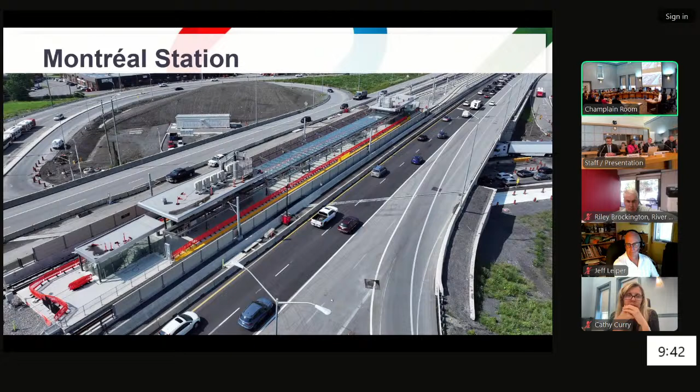Montreal Station, as you can see, the station platform is basically completed. We have orange protection gates because train service testing is currently underway all the way out to Trim Station in the east, very successfully. A lot of the underground work is what we're working on right now, so you'll see some lane closures and restrictions as part of that.

The left photo is actually the fare entrance gate and the lantern on the far left that you can see there. We've finished the cycle track and sidewalk works. Now we're currently working on the east side of the station to do the same. You can see the coil grills are in place, as well as the signage and wayfinding that's started on the east entrance.

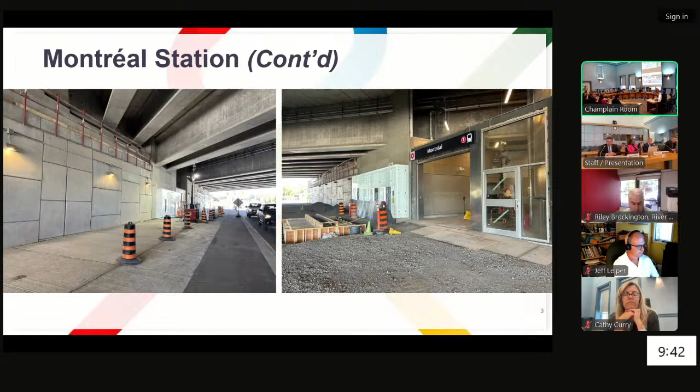Jeanne d'Arc Station itself - we're currently working on the interior station finishes, and the final connectivity portions to the station. On the right-hand side of the photo, a lot of the hard surface works, sidewalk entrance into the plaza, as well as the asphalt works have been completed. We'll see more of that on the next slide.

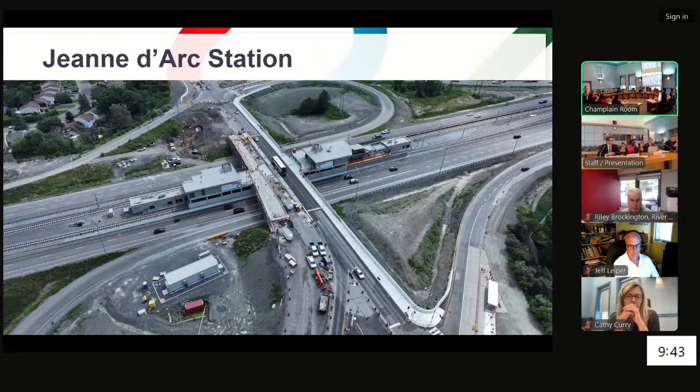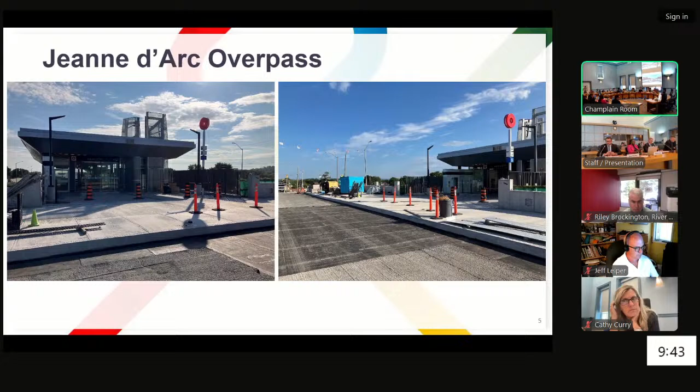As you can see here, our plaza entranceways are completed into the actual station entrances. The hard surface works for pedestrian access are completed. And we're currently working on the waterproofing on the bridge structure, as well as the asphalt to come.

Convent Glen Station - we're currently working on the sidewalks, as well as passenger pickup and drop-off areas on the quadrants of that station. We're also working on the elevator installation and interior finishes at this station.

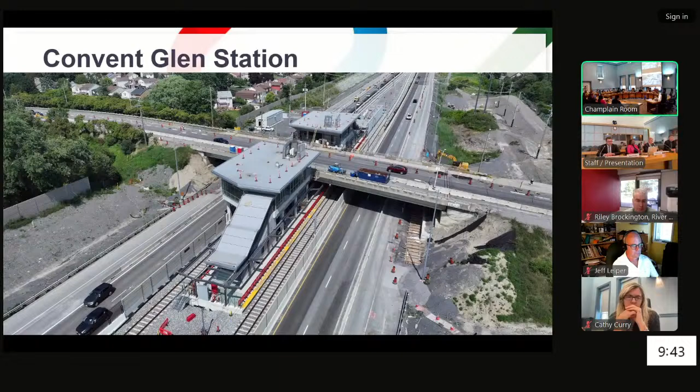In this slide we drop into the actual station platform. You can see our staircases are completed with handrails. The lighting is done on the platform. Our platform edging is in place. Wayfinding and signage is there, and you see some protection on the actual elevators, protecting the stainless steel. Essentially a finished product at the station right now, from what you would see.

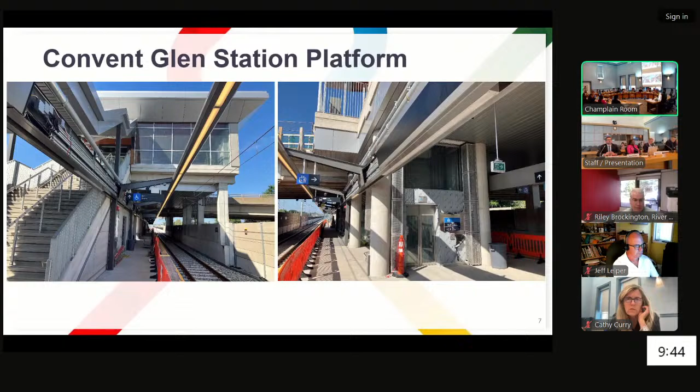Place d'Orléans Station - we have the existing pedestrian bridge structure, which you can see is the red roof structure, going from the bus rapid transit park and ride to the Orleans Mall Centre. We have the new pedestrian bridge that's been put in place, connecting our BRT loop facility to the LRT platform. Currently we're working on the bus loop construction and park and ride rehabilitation.

What you can see here on the left photo is actually the last fare gate system to go in as part of the east. Pretty exciting for the group that once that's in place, more testing and commissioning can come as part of it. A lot of the interior finishes are essentially complete, with just minor touch-ups remaining.

The photo on the right-hand side is that new pedestrian bridge connection structure that operates between the bus rapid transit system and the LRT platform. Through the glazing on the left-hand side, you can see the red roof of that existing PED structure, so they run parallel to one another. As part of this bridge structure, a lot of those drilled holes on the right-hand side are basically going to be the tactile warning strips put in place for accessibility and wayfinding for those users.

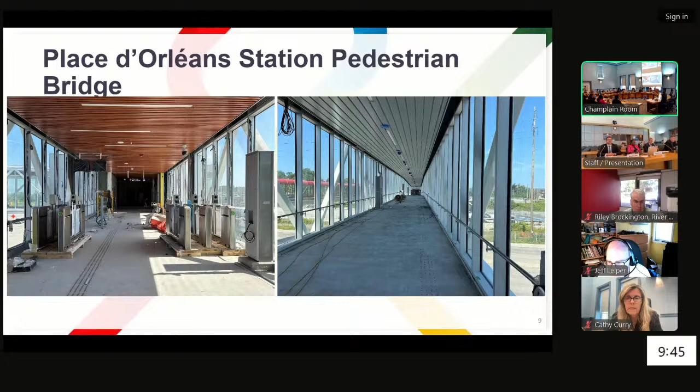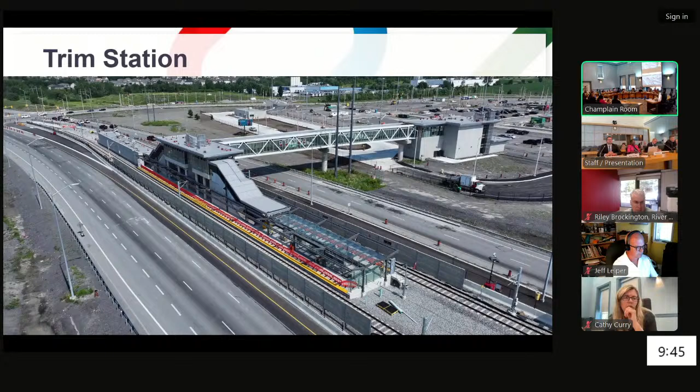So the last station on the east as part of the system—currently we're working on the escalators and elevator installation in the station and the BRT connection, the bus operator building commissioning, which is just far on the top of the actual photo. We'll get a close up in a second, as well as we're working on the park and ride construction at this location.

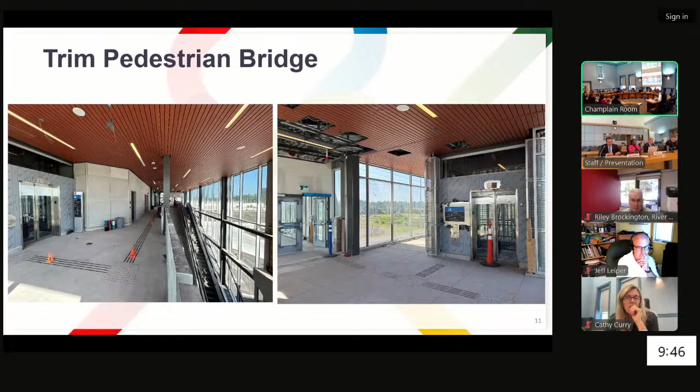The photo on the right is where essentially you would come to as part of that. We have our elevator systems shown there. Just behind that area where the glazing is, left of the elevator system, you would carry through there and down onto the platform edge. A lot of the interior finishes are done, with minor cleanup to be completed, but essentially it's looking like a finished product here.

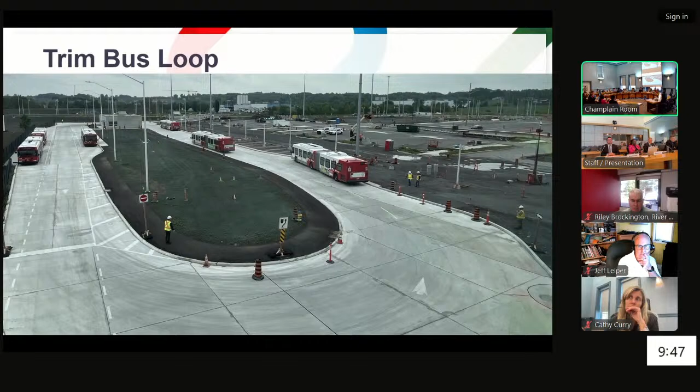This is the bus loop at Trim Road itself, basically completed at this time with some minor finishing work to be done. A couple of weeks ago, we actually completed the test run for the OC Transpo to make sure that it will operate as intended, and it was a successful test procedure. In turn, we're looking to flip the buses into this bus loop in the middle of September here.

As part of other works we'll see in the east activity, we'll have some connectivity enhancements that will continue at Jeanne d'Arc Boulevard. Train testing will ramp up as we move into winter 2024. Station completion is a big milestone we're looking forward to in winter 2024—this is where these finishes will come into play. Testing and commissioning will continue to move along, and occupancy for these stations will start to materialize. At the end of 2024, we're going to have some paving operations happening on the 174, essentially from Champlain to Trim.

Just some highlights related to traffic and mobility impacts: on Highway 174, there'll be ongoing lane and ramp closures to facilitate a lot of these paving works in 2024 as well as 2025. Montreal Road, as shown in some of the photo updates at the start of the presentation, there are impacts right now with lane closures, to facilitate some of the station entrance works as well as utility works.

Jeanne d'Arc Boulevard—we still have various traffic configurations, so we're flipping traffic to facilitate a lot of the works for the entrance as well as the bridge rehab that needs to be done. Because of the expansion of the bridge structure, we'll essentially have to put new bearings underneath it, so there's some bridge work to be done, with impacts in this upcoming season. As well, Orleans Boulevard and Champlain Street will have lane closures and restrictions in this area, to help facilitate the construction for our Place Orleans station.

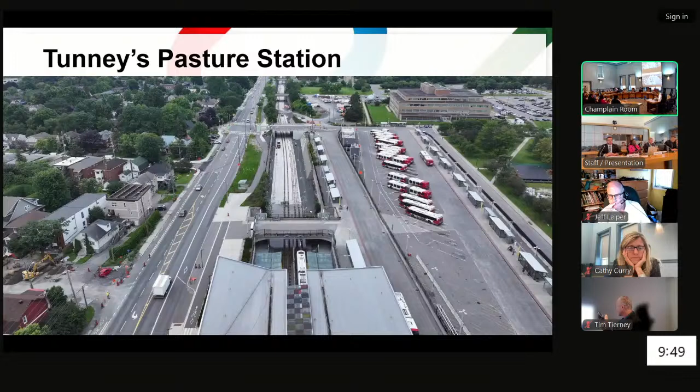So the first station is the stage 1, stage 2 interface as part of Tunney's Pasture. Construction is currently going on the rail system, where we're constructing the concrete rail plinths that need to go in place on top of the storm sewer system, as well as working on the ultimate bus rapid transit system design layout. Where the buses are now is the interim phase. We're currently working on an ultimate arrangement for when LRT stage 2 is in operation, working with Public Services and Procurement Canada, and hoping to have the design finished by the end of this season.

So what you see here is the rail interface between stage 2 and stage 1. A big milestone we completed recently was during the 2-week maintenance shutdown, where there were many coordination meetings and efforts by staff and the maintainer to facilitate some tie-in works. What that does for us is minimize the impacts to stage 1 revenue service. A huge milestone for the team, well done to them.

The works done as part of this, just to clarify: we had OCS tie-in works, and we had to provide new contact wires from the stage 1 into the stage 2 interface.

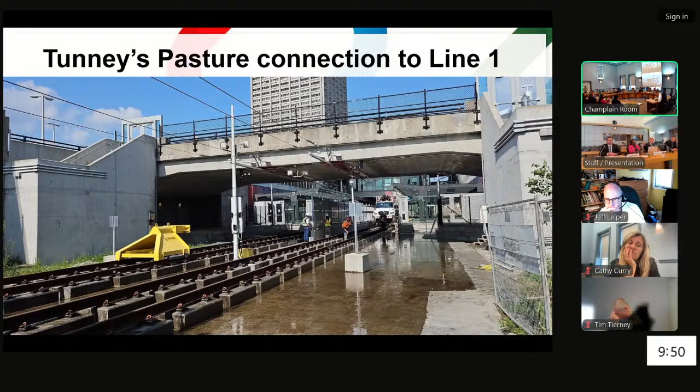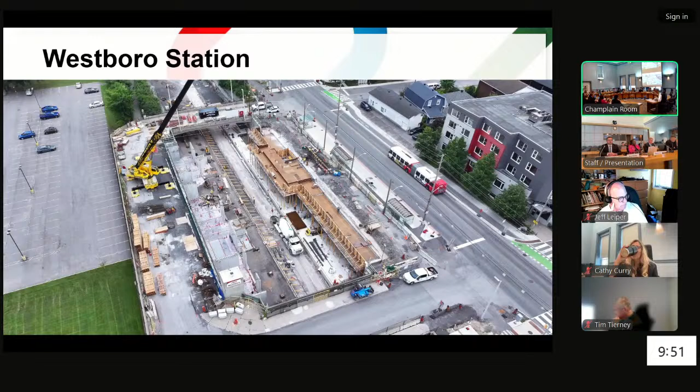Westboro Station: a lot of the works are focused within the trench itself, related to concrete works on the platform and the walls supporting the structure.

You can see a lot of the formwork there. The platforms are poured at this time, with a lot of formwork and false work in place to facilitate those concrete works. One thing I'll note is that when the rail system gets put in place, between these platforms there's actually a concrete structure - a major storm sewer collector system that the rail system will run on. That system takes water from the Westboro area and travels all the way down through Tunney's Pasture and out to the Ottawa River. We're currently working on rehabilitation of that structure, then concrete plinths will go on top, then the rail structure. You'll start to see that materialize in the fall and in 2025.

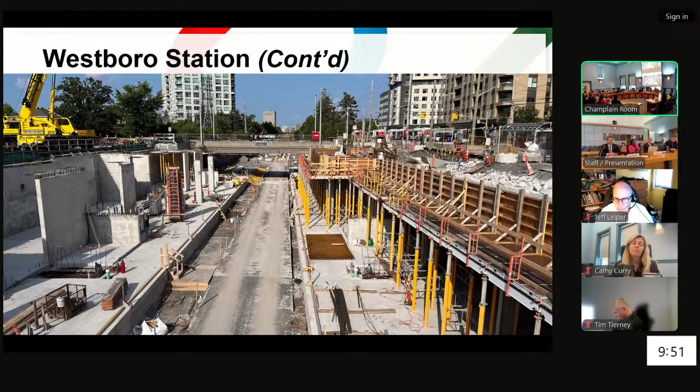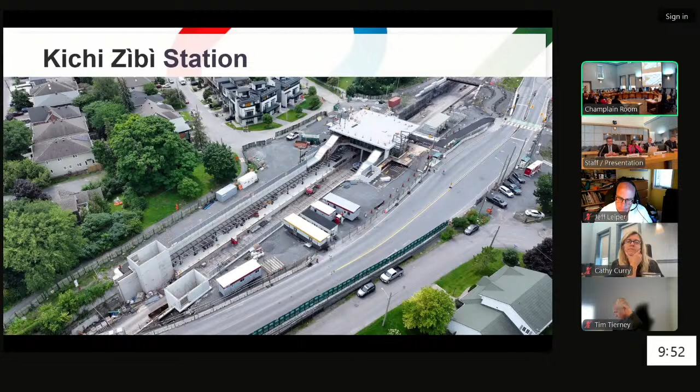This is the west edge of the station for Kichi Zìbì, and this is the new pedestrian access in and out for that location.

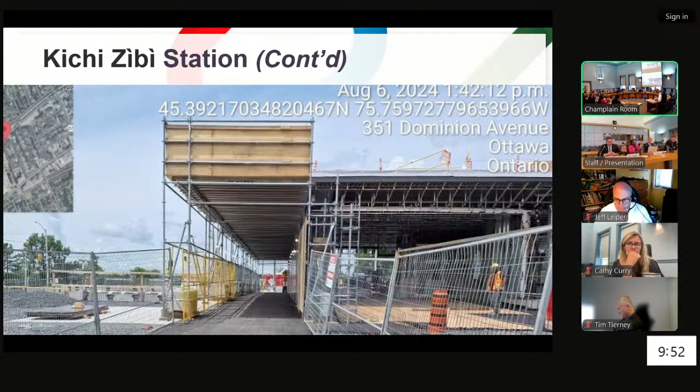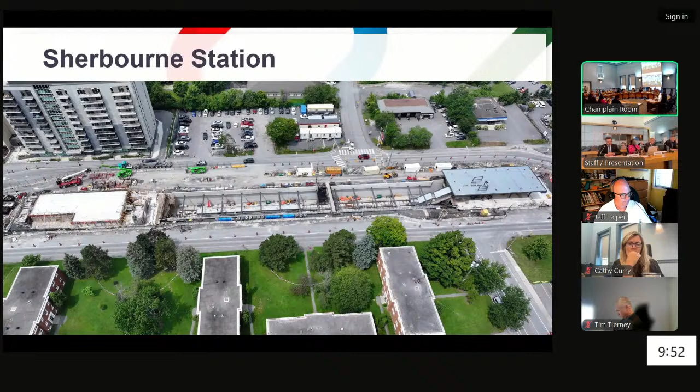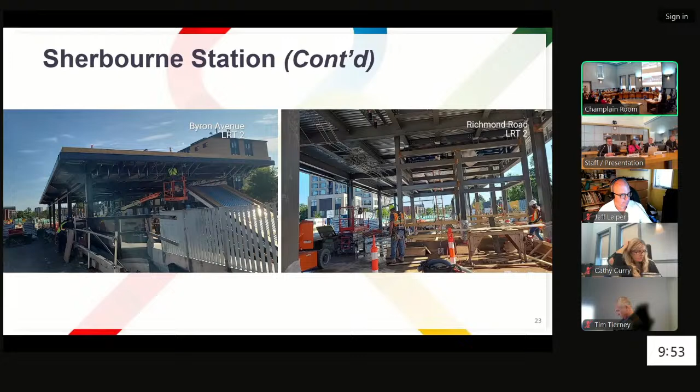Sherbourne Station is the first station on the Parkway Tunnel. The concrete works as part of this station are essentially completed, and we're currently working on the structural steel. Diving into the actual head house itself, you'll see a lot of the steel work is in place, the roofing, and some mechanical components. The next works to facilitate are the glazing component, to start enclosing these structures.

The next station moving west is New Orchard Station. It's similar in nature but a little more advanced than Sherbourne Station. Here our structural steel is completed, and we have glazing works on the station underway. Progress is looking well.

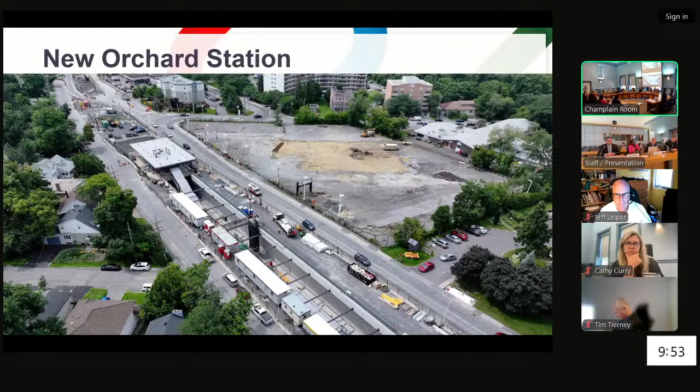At platform level, you can see a lot of the interior shell of the station platform. It is a center platform station. We have drywall, some mechanical and electrical work to go underway here coming up next. Following that, we'll start pulling concrete plinths and rail through the actual station itself.

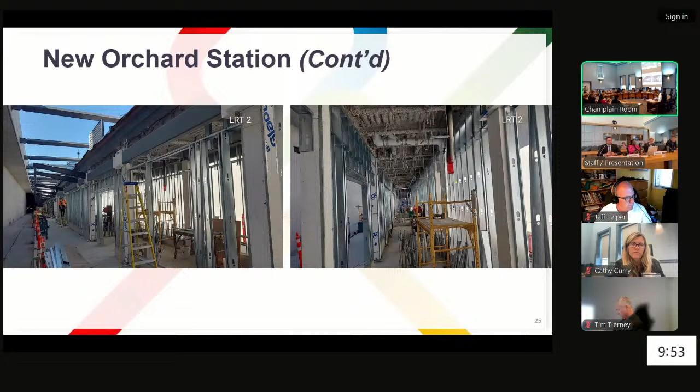So I want to give you an update on the cut and cover progress as a whole. We completed the tunnel construction components itself and started the backfilling components. There's a lot of work shown in this area that may not be apparent to the public. We have the Parkway Tunnel, the East Portal entrance to it, and Kichi Zìbì Station off in the distance. We have the temporary bus tour currently in place, and Kichi Zìbì Mìkan, which we're phasing and staging to facilitate construction of the tunnel. Off to the right is where vehicles and C-cans are, which is Rochester Field, but ultimately it'll be rehabilitated into a park area. There's a lot of work still to come here and a lot of coordination involved.

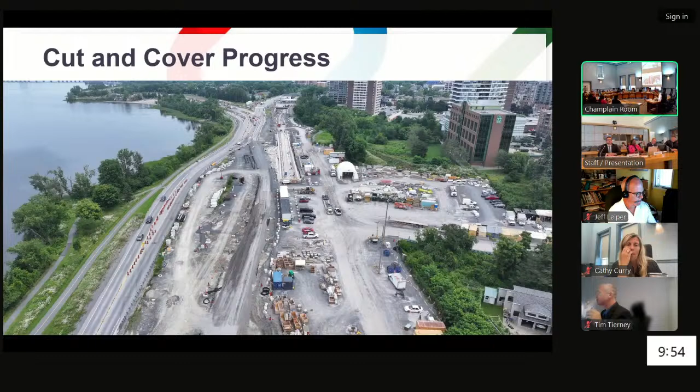In the tunnel itself, we're doing a lot of construction of the concrete plinths and the rail. The plinths sit on the direct fixation or invert slab of the structure, and we place our rail structure on top of that. For construction, we start by drilling into the invert slab of the tunnel, then start rebar installation. On the left you can see the formwork, which is the next part of the process. We place the concrete, let it cure, then pull apart the forms. Once completed, we put the rail inserts in and start rail installation on top. After that, we work on refinement and tuning of the actual rail alignment.

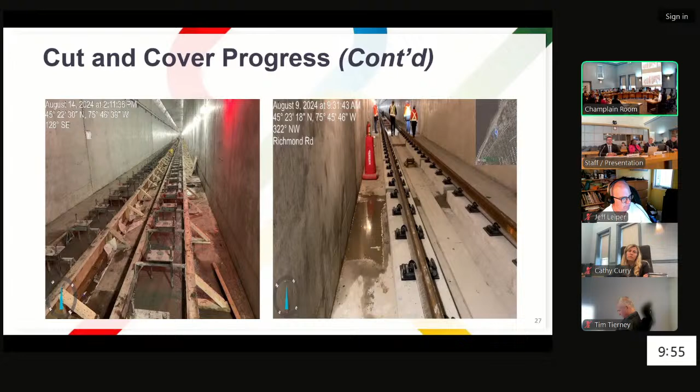Looking at some of the portals and entranceways as part of our cut and cover, this area is more the Connaught area in Queensview. On the left-hand side, the plinths on the north side, which is the right-hand side of the photo, are complete. We're currently forming the left-hand side, as well as the trench works shown on the right, which is the approach to Pinecrest Station. The bridge structure in the distance is Queensview itself and Pinecrest.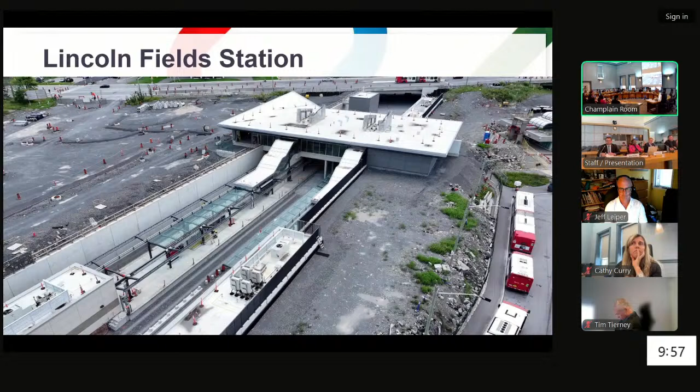The other thing I'd like to mention at the station for the LRT is we're currently working on fare gate installation. It's starting to progress in the west. As indicated, we have one last one to do in the east, and then we'll concentrate on fare gates in the west.

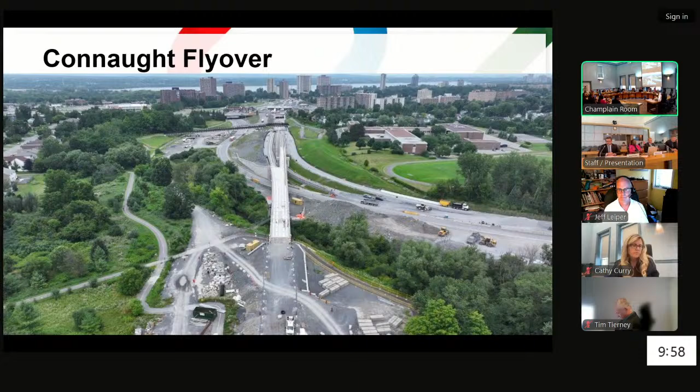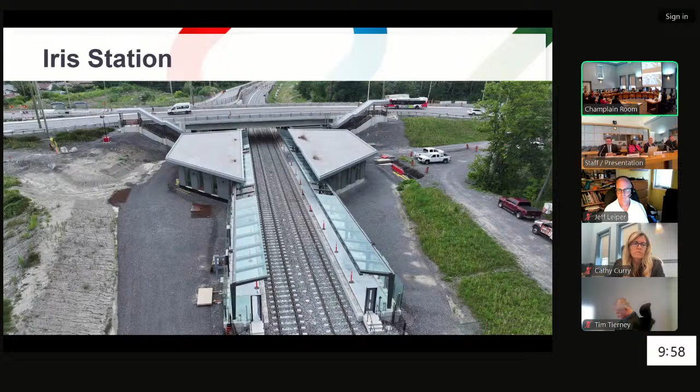Continuing south, we head to Iris Station. Iris Station essentially is a finished product for the most part. We're currently working on grading surrounding the actual station itself. Next photo, we'll get a look from what it looks like within the guideway itself. So you can see here the product looks like a finished station.

A couple things to note: we have an interior protection barrier that needs to go in place, which you can see the foundations currently down the center between the two tracks. And the platform edge isn't installed at this current time. What we'll do is wait for final alignment of the rail system itself, then set that offset distance appropriately and pour that in place.

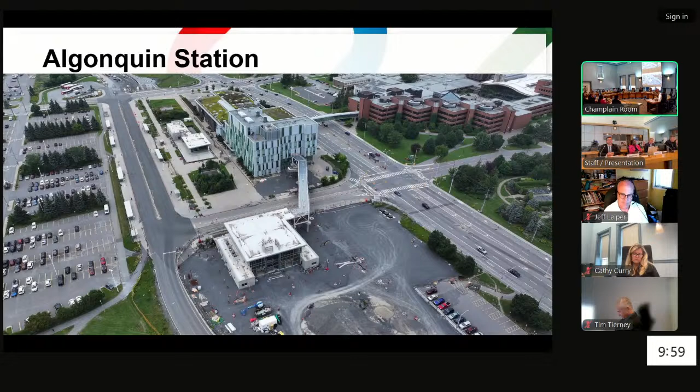Heading south to the last station, Algonquin. It's one of these stations that we can't really see. I don't think we've actually shown any photos within the interior shell itself of actual real progress to date. The white building you see there is the entranceway into the LRT system. We also have a pedestrian structure connection into Algonquin Station.

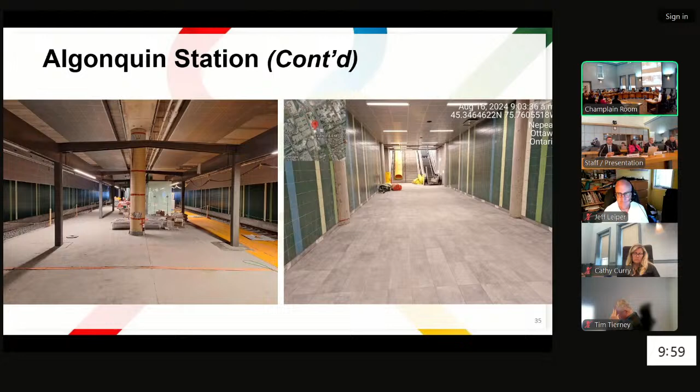The next photo is actually down inside the LRT station within Algonquin itself. Progress is underway. The photo on the left is the platform area itself. You'll see we have the lighting, the steel in place, acoustic panels in place, and we're getting ready for tiles on the left-hand side. The right-hand side, in the common area, we have tiling already in place, wall tiles, etc. Minor interior finishes are currently ongoing.

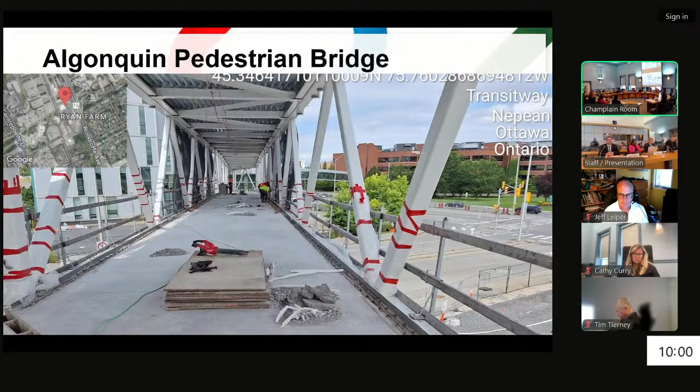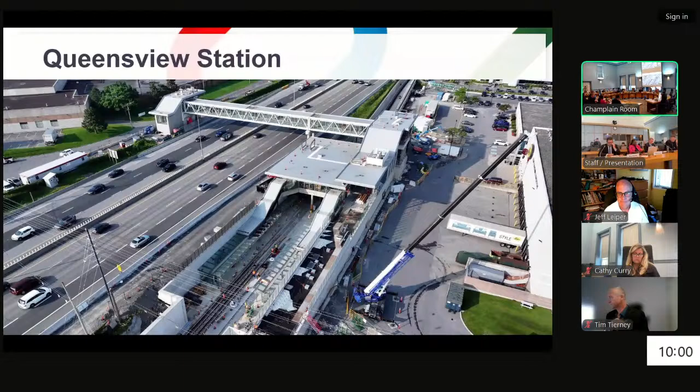Next slide, so now we're traveling west. The first station you'll see is Queensview Station. This is in the trench on the north side of the 417. Currently working on servicing to the station, which includes dry and wet utilities, as well as getting permanent power.

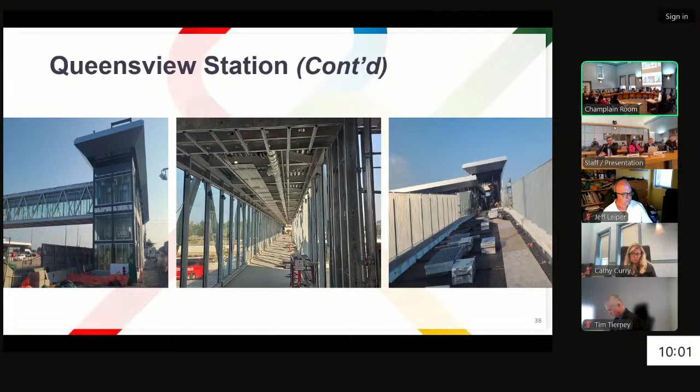Some photos, a little bit closer view and an update. On the left-hand side is our elevators 1 and 2, on the south side of the 417. The middle picture is our interior look of the bridge structure over the 417 itself. The glazing is completed. We're currently working on some electrical, mechanical, and the ceiling of this structure, and interior finish works will continue as part of it. On the right-hand side is our ramp access into the actual station and the pedestrian overpass over the 417.

Continuing west, we move into Pinecrest Station. Currently in the station, we're working on testing and commissioning, as well as looking at constructing the platform edge soon, as this location has already been pulled through with construction of the concrete plinths and rail. We'll see that in a second in the next photo.

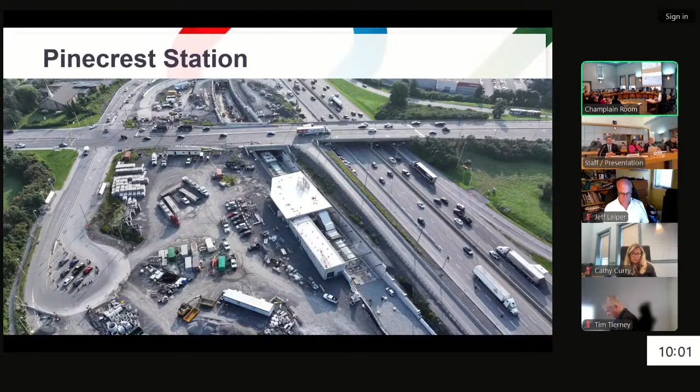In this photo, you can see we've started to pull rail all the way through. This photo is west of the station itself, towards Bayshore Station. Through the station itself is direct fixation, and then we have a transition to ballast. We pulled that through as part of it, and we're working on the skeleton track as part of the ballast towards Bayshore at this time.

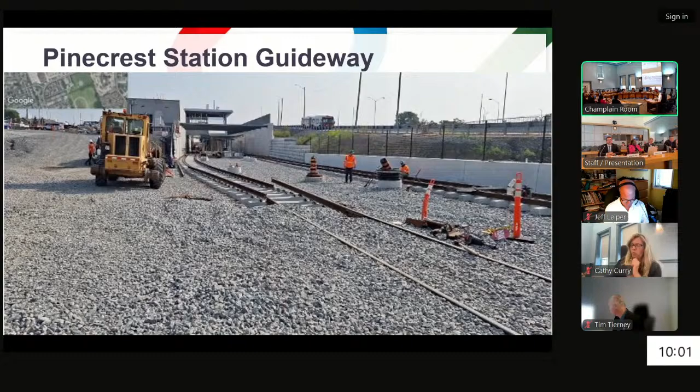The next photo is of Bayshore Station itself. We had to get the emergency egress tunnel underneath completed before we could backfill it. That's been completed, so now we're moving on to some of the rail infrastructure, the subgrade and the ballast infill. We're also working on the existing elevator systems as part of the BRT that's been converted to LRT, and that's currently ongoing.

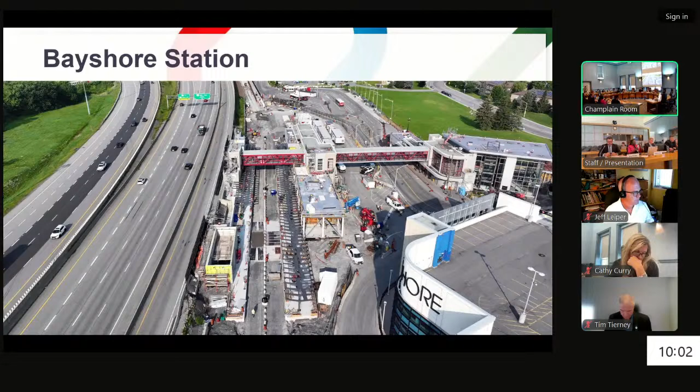The next photos show more of what we'll see as part of the station itself. The left two photos are of the LRT conversion from the existing BRT. On the platform edge, top left, we have our structural steel in place, as well as the bottom. You can also see we've pulled the initial track and rail through that actual alignment. On the right-hand side, the photos show the current bus rapid transit arrangement of the loop, currently in a temporary state. Once we get the LRT system in a more completed situation, we will ultimately flip to focusing on the bus rapid transit ultimate setup as part of that loop.

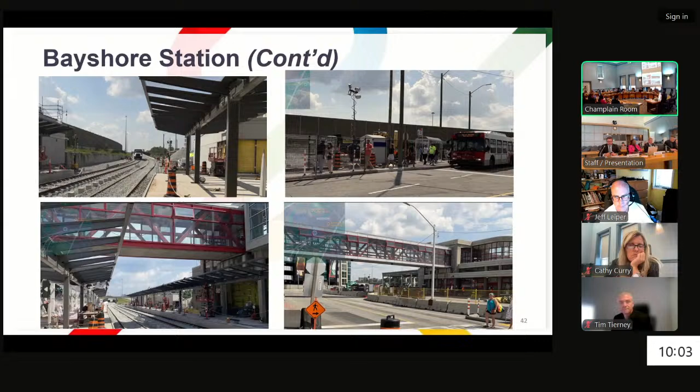Heading further west, our flyover structure at Holly Acres is a direct fixation structure. We just want to show some progress on this as well, as we're pulling the skeleton track through, as you can see in the photo there. The next photo will give us a little better view of the progress.

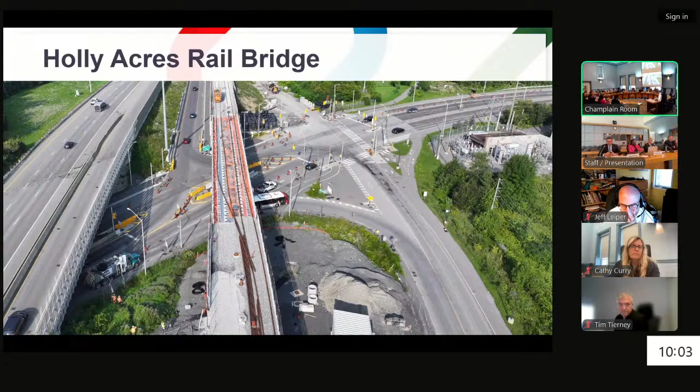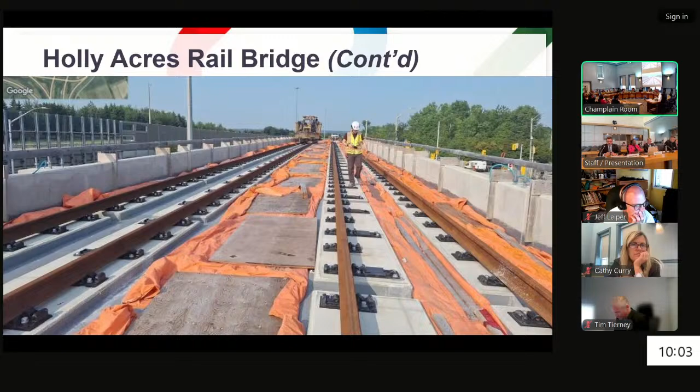So the concrete plinths are currently put in place. The rail inserts are there and fasteners. The rail has been put in place, and we're slowly working on finishing up the alignment and adjustments of the rail system.

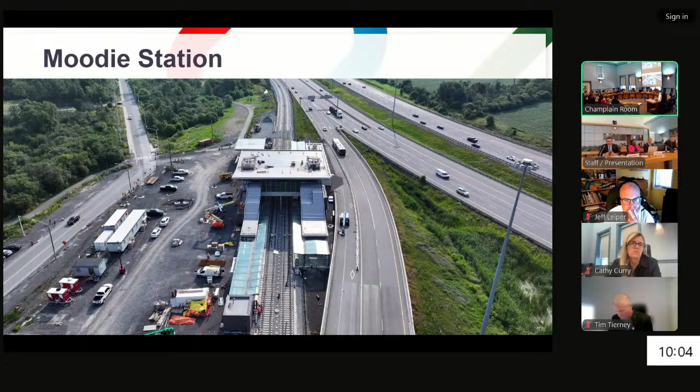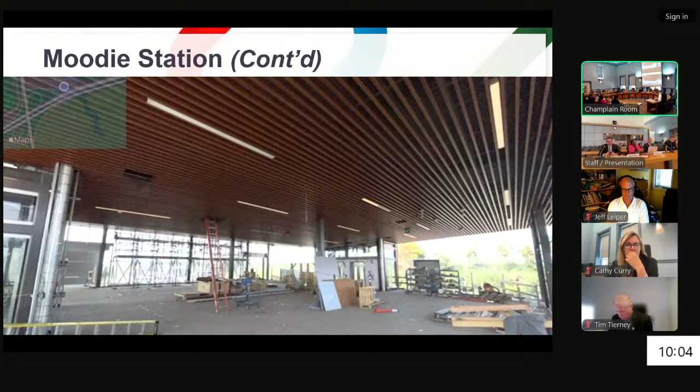Inside Moodie Station at the upper level, the ceiling panels are in as part of this. The glazing is enclosed as part of the building itself, working on interior finishes, and fare gates coming in the fall of 2024.

So the last component to the rail expansion in the west is the LMSF itself. We're happy to say that next week we're actually going to have our first delivery of an LRV to the station. We'll take some time to assemble it accordingly. What this does for us as a whole is it starts the actual testing and commissioning in the west.

If we didn't do so, ultimately we'd have to wait for the rail system to be connected all the way from Tunney's to the LMSF station, slowly pushing trains out from east to west. This way, we're going to facilitate the actual testing from west to east. As we move forward through the remainder of 2024, we will look to have other LRVs delivered to advance that testing further.

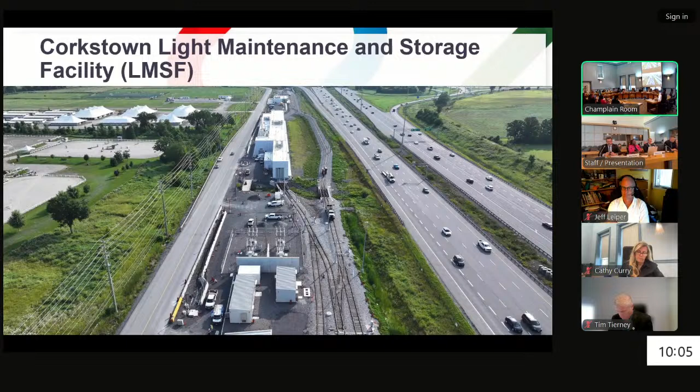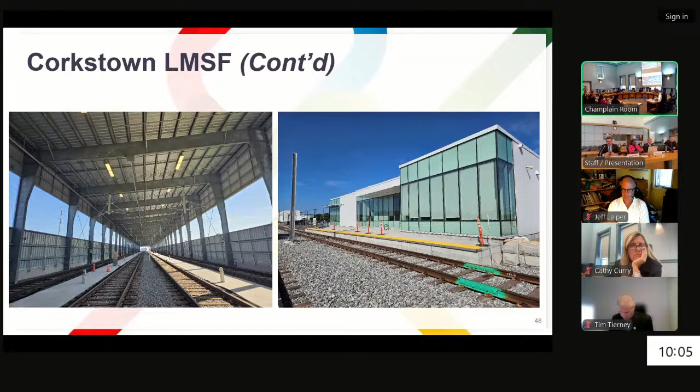The photo on the left here is actually the storage shed where the LRVs will be placed at night, so they won't all be housed at the Belfast MSF itself. And the right photo shows the administration building, where the drivers of the LRVs will basically start their day and end their day.

Other activities to mention and highlight here: the completion of Pinecrest Stormwater Pond is essentially in operation as we speak. We're looking to have an opening ceremony in coming weeks related to that officially. As mentioned, we have the first LRV going to the LMSF next week, and the commissioning of LMSF will start soon in the fall.

The revitalization of Richmond Road project is ongoing. We hope to have a better update related to that at the next subcommittee, with photos and what you can expect, as well as in 2025, the installation of the OCS system on the main line as the skeleton track gets completed.

So the west traffic and mobility impacts. To summarize, basically at the interchange between Pinecrest and Richmond, our construction works will continue through the spring to fall of 2024. There will continue to be impacts to facilitate the complicated construction works in the area as part of Pinecrest Station, and we hope that a majority of it will be wrapped up by the fall of 2024.

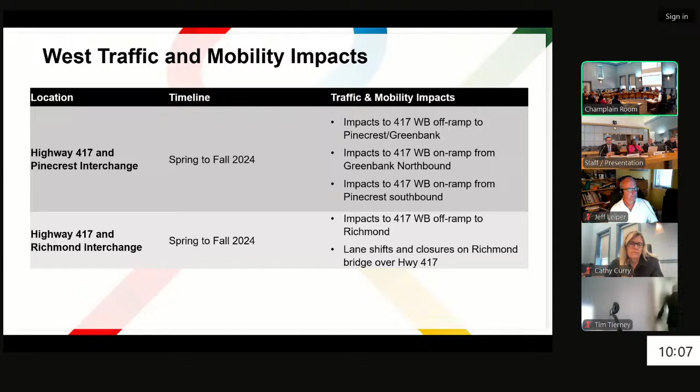Some other things to highlight on the next slide, please. Other things to highlight on some of the local road network as part of the city.

So Corkstown Road, we have some construction works required here, in particular at the intersection of Moodie and Corkstown that's underway. Kichi Zībī Mīkan will have multiple long-term closures to finish the road, so there's a bunch of staging configurations that need to be done as indicated, in order to work with the construction of the tunnel itself.

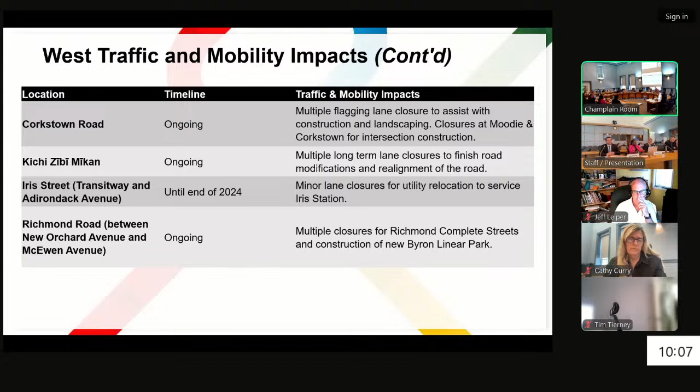Iris Street itself, we're going to have some minor lane closures along that location for utility relocations. And Richmond Road is ongoing; we're going to have multiple closures for Richmond Road complete streets and the construction of our Byron Linear Park.

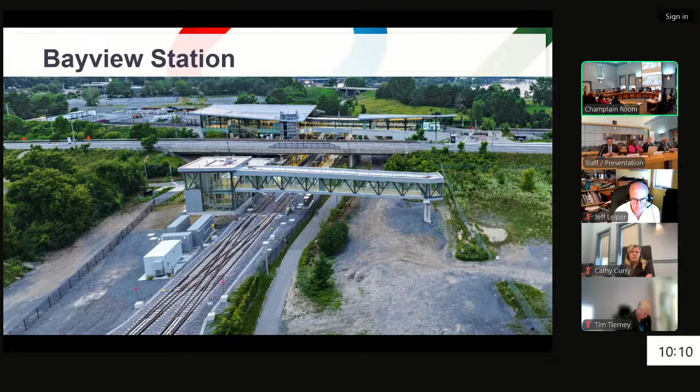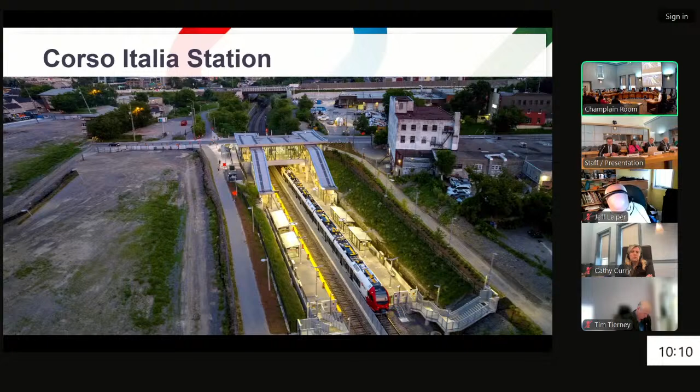Moving to our next slide for Corso Italia. Some of the major works taking place now are the pedestrian crossing, the signalized crossing that will come in for the MUP crossing of Gladstone Avenue. Otherwise, the station itself is substantially complete, and landscaping works are coming along very well. Here's another view of that signalized intersection crossing. The civil works are nearing completion, and that will be followed by the traffic signals installation, which will allow us to get that much anticipated MUP signalized crossing into service.

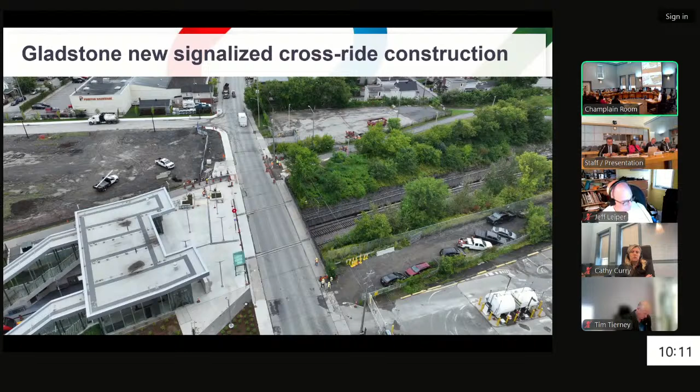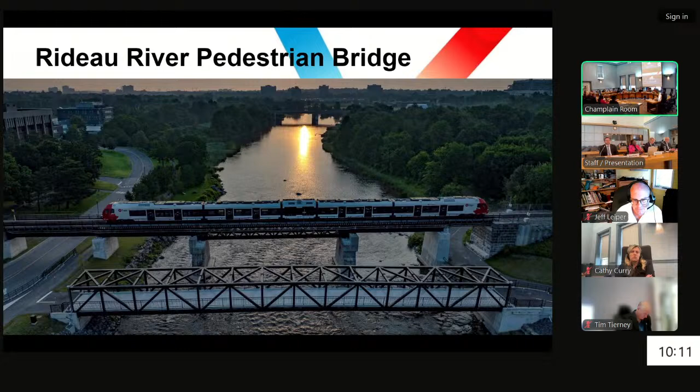Moving south, we have the Rideau River pedestrian bridge, just to celebrate the opening in mid-June. I know this bridge is very used and enjoyed by the public, so we want to highlight the good work to get that bridge put into service.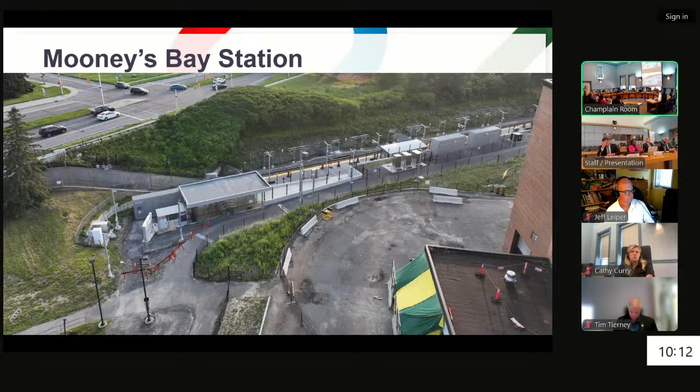Next up for Greenboro Station, works are progressing well. Some of the recent activities include deficiency closeout, including fixes that were needed for the snow melt, which has been successful. So now the snow melt is working at this location.

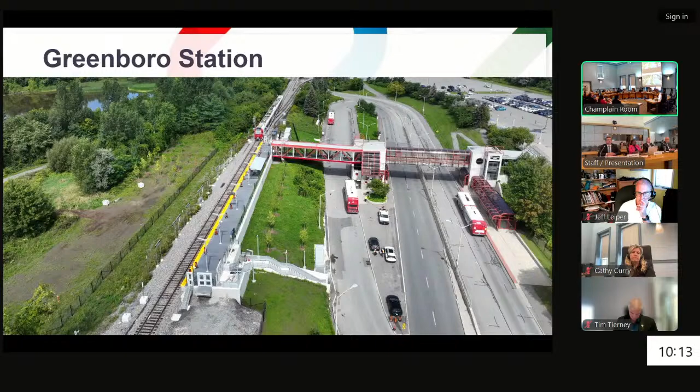Next slide brings us down to Hunt Club Road. Some of the MUP works are in place, which we can see in this photo, or ongoing rather. What that means is that the pathway leading from South Keys Station southwards to Hunt Club is currently closed at that location, and there's a detour in place. These works will be taking place through the fall, and there will be other additional works coming up along Hunt Club Road as well that should be starting in September. We're just waiting to do some traffic signal reconfiguration that is needed to enable the starting of those works.

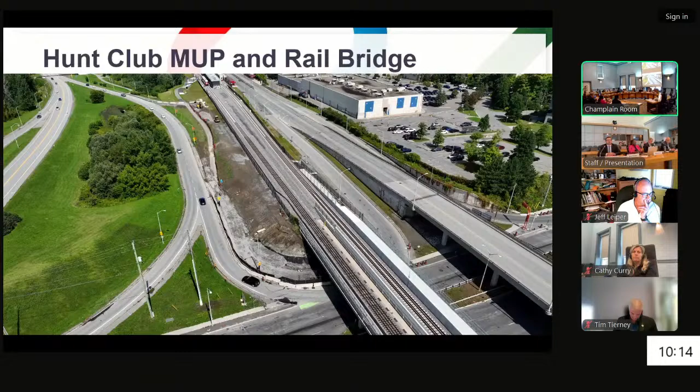Moving southwards at Leitrim Station, the station itself is substantially complete. As you can see here, landscaping is coming along very nicely. The buses have been moved into the permanent bus loop at this location, and that has allowed us to open up that final area of the park and ride to complete, which we call phase 3. That's really where works are currently focused at this location.

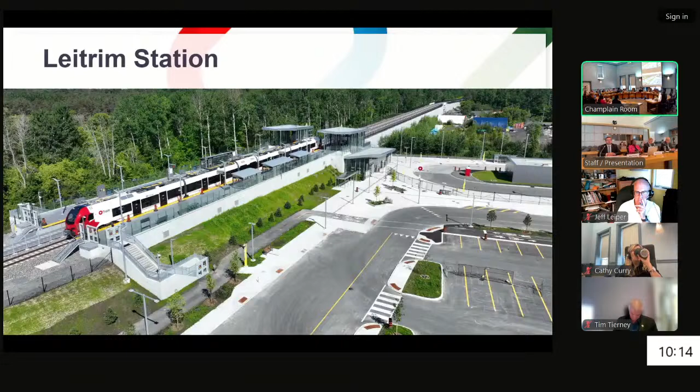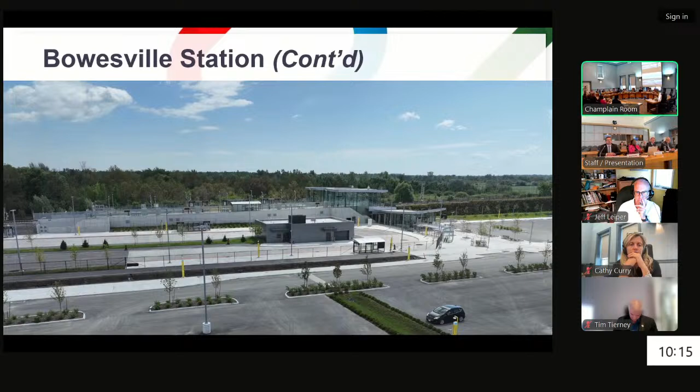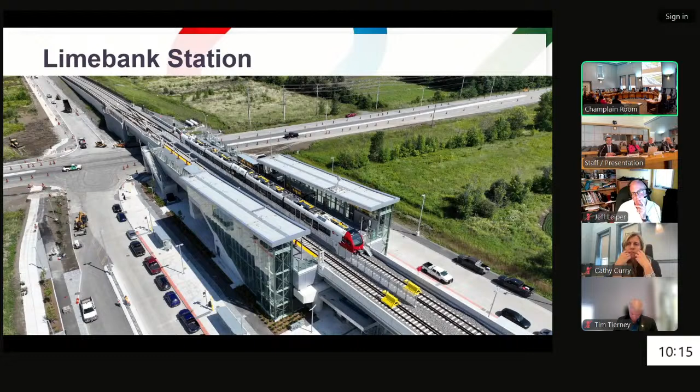Now for our southmost station of Limebank, major activities here are civil in nature for some of the works along the bus loop, some of the flat works, and completing the signalized intersections at this location.

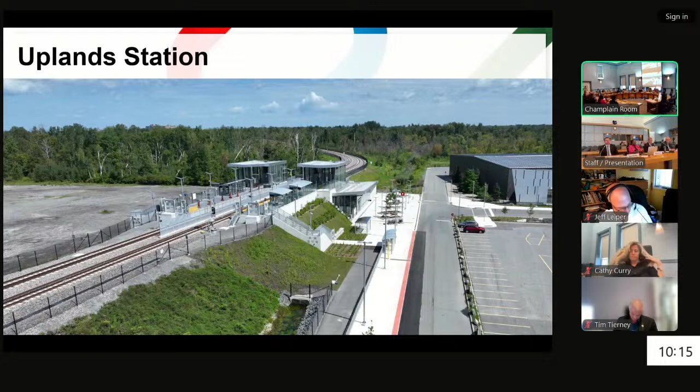Now if we move along the airport spur, for Uplands Station, the station itself is substantially complete, allowing that very proximal access to the EY Center. Activities in this location include reinstating what was a laydown area on the left-hand side of this photo, and then handing that parcel back to the Airport Authority.

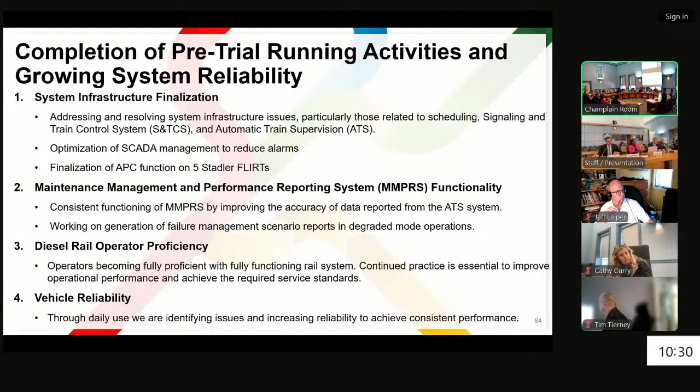I will now hand over to my colleague, Troy, to talk about some of the operational and maintenance issues. Thank you, Richard. Yeah, so the first item that I'll be talking about is the status of the operations and maintenance training.

With regards to the diesel rail operators, we previously talked about having a minimum of 54 required. We've trained 56 - 56 have successfully completed the training, and we have 7 more in progress right now as well. Our diesel rail operator instructors - the bulk of them will be able to return to driving trains when the training is largely completed, and they can support trial running.

Of the trained operators, though, it is important to note that some have moved on to other positions, and some are not available currently for active service due to some long-term absences. So our staffing is definitely a work in progress right now, but we've got plans in place - we've got the 7 that are in training, and we're planning to recruit. We're in that recruitment phase to bring on more operators, because we know that once we launch, we need to sustain this for the long term.